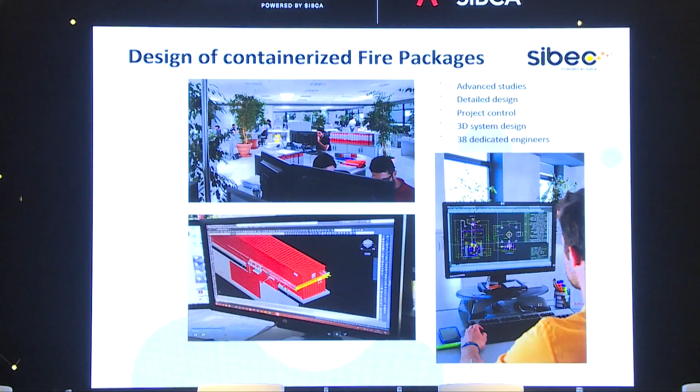Our company is located near Milano in Italy, and you can see the first building is covering the activity for the production of fire and gas systems. The central part is the mechanical shop for the equipment system and fire trucks as well. So in our organization, we have about 200 people. 40 of them are dedicated to the research and implementation of the technology and design of the system.

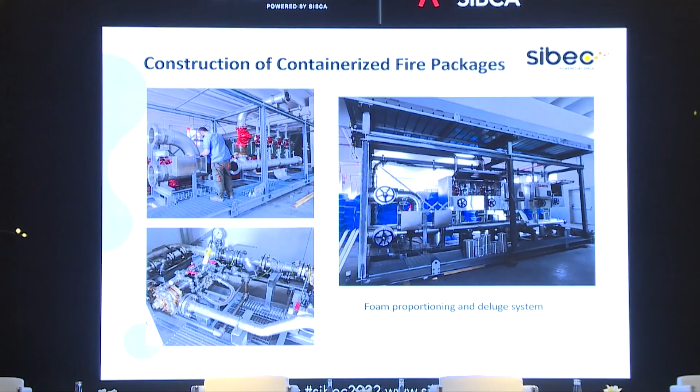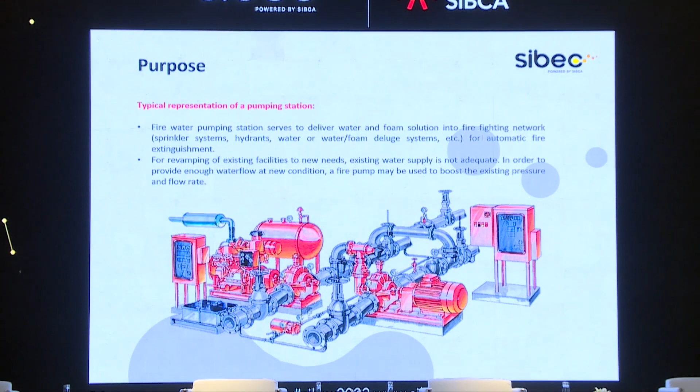You can see some activity during the construction of a deluge skid-mounted valve foam system, and this is a typical configuration of a pumping set. As you noted, there are many components, and each one needs some attention in construction and testing and so on.

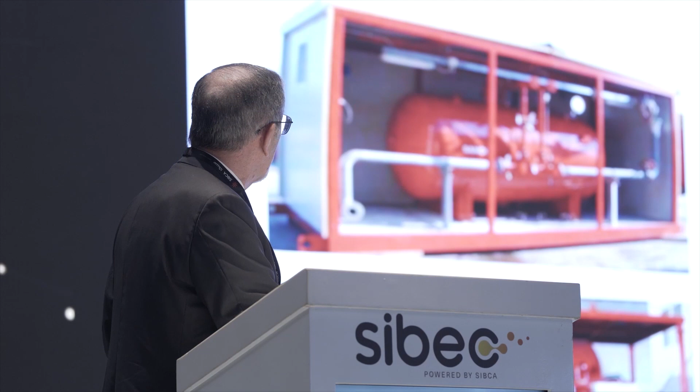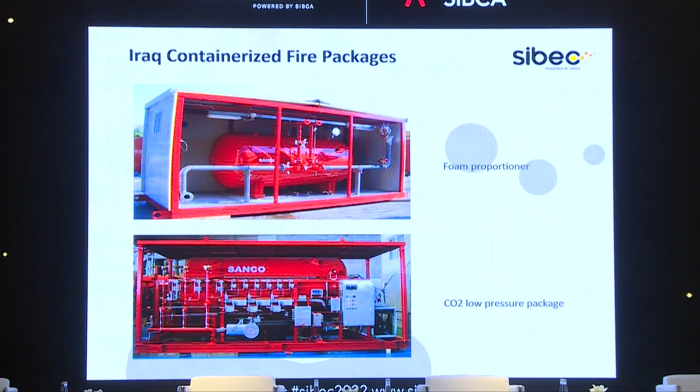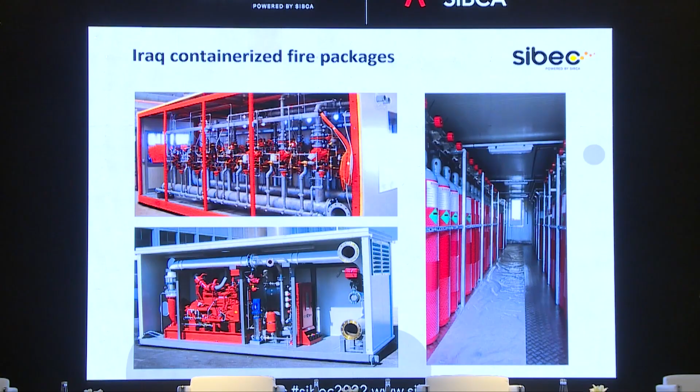What we did in the past, in the last 20 years, we started with Bechtel for a project in Iraq where they needed containerized packages in a very short time in safe condition, and we started those applications. It's just one part of our activity, to build the system in the container. So any system can be realized in a container.

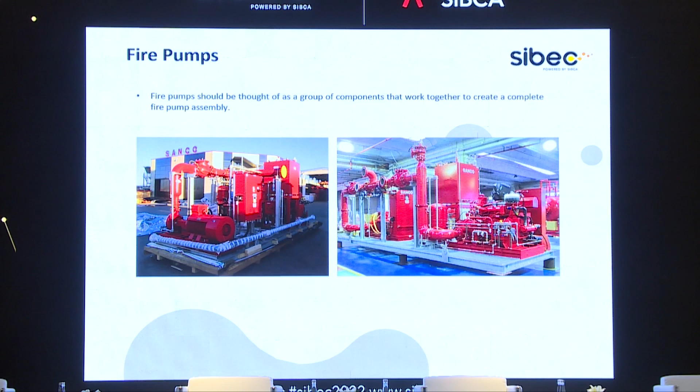So this is a typical design of configuration of a container 15 meters long. So it's quite complex, and it needs much attention during the construction and the relevant testing. You can see now some pump assembling. This is a typical construction that we developed, as I told you, 20 years ago with Bechtel, an American company that everybody knows.

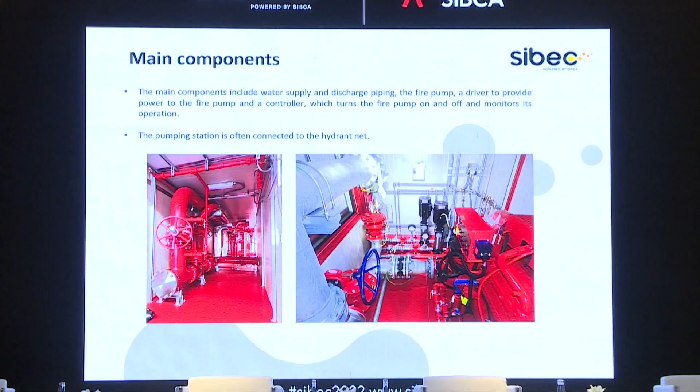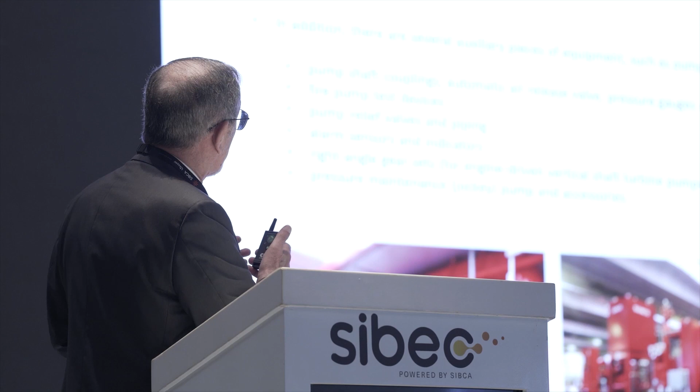The main components are inside the container. The container could be insulated according to the environmental condition. It means in some cases like the Gulf, we apply air force or air conditioning system, or in the opposite case, for very cold weather conditions, we apply the heating system.

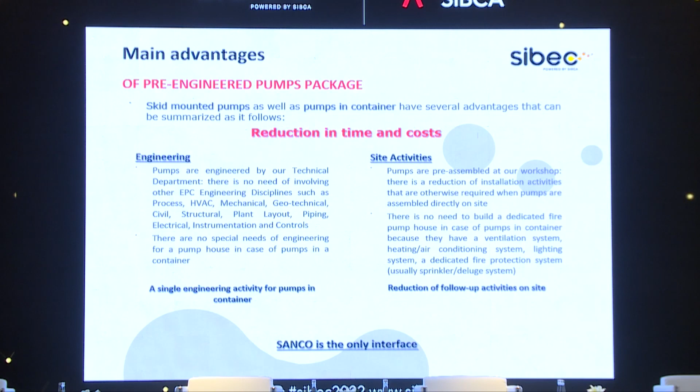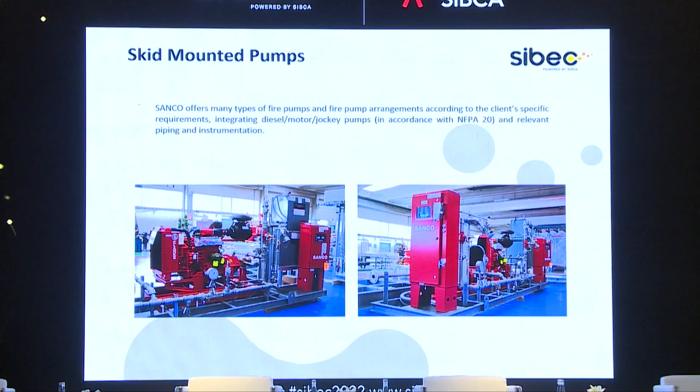So what are the advantages to build in the system, any system? We see some cases later on where we have a prompt answer for the installation, for instance. Safety condition for the people during the construction, avoiding any risk of leakage during the construction on site.

So everything is pre-tested, pre-assembled in our premises, is transported on site and very easily fixed, like a plug-in unit. In some cases, the container can be 2 units together to create really one pumping station or housing for the system. Like in this case, we have a canopy for the diesel engine to contain the noise in accordance with the specification. Other pictures showing the same.

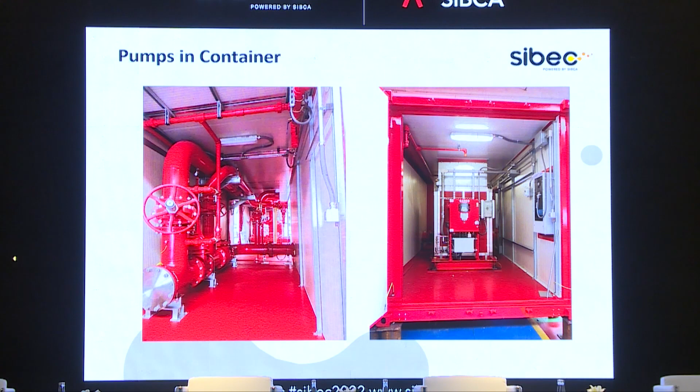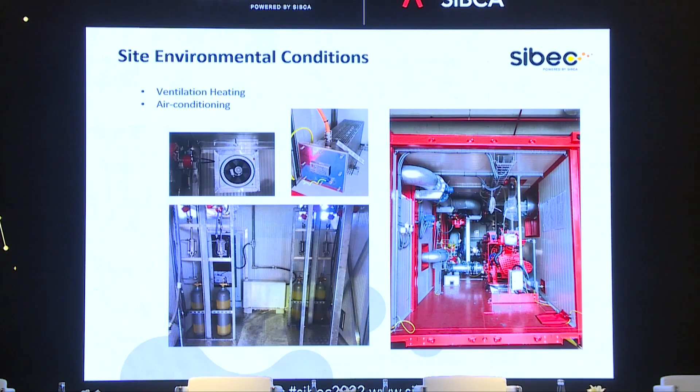As you can see on the content of the container, we have the insulation, as I mentioned before. Of course, in that case, we have the ventilation and the heating or air conditioning system to protect the content. Other systems in container: in these pictures you can see the deluge valve skid mounted, or in the next pictures, we see other cases.

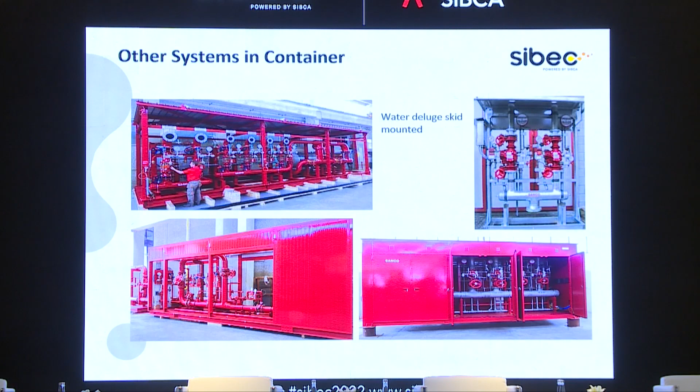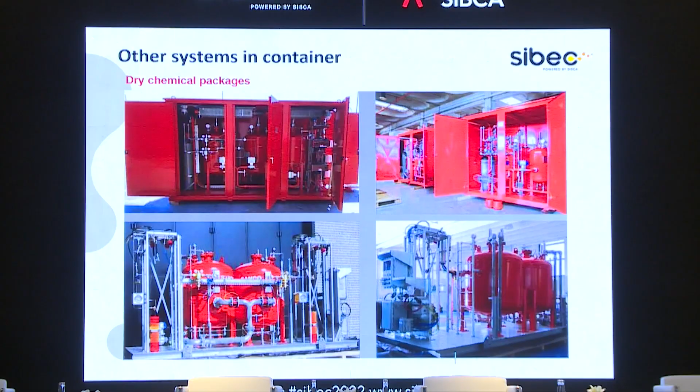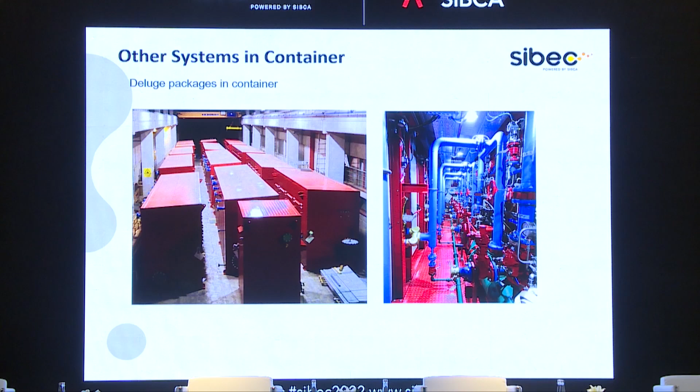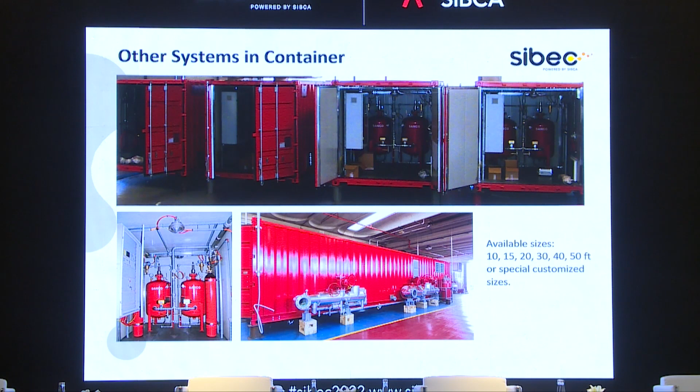The biggest unit we built was 15 meters, having a weight of 30 tons. Other systems are dry chemical systems in several capacities. In these pictures, we can see 18 units in container. We supply to Russia, and everything is built in accordance with the local regulation, and especially the low environmental condition, down to minus 52. In those cases, we supply to Algeria, in the contrary case, for temperature up to 65 Celsius.

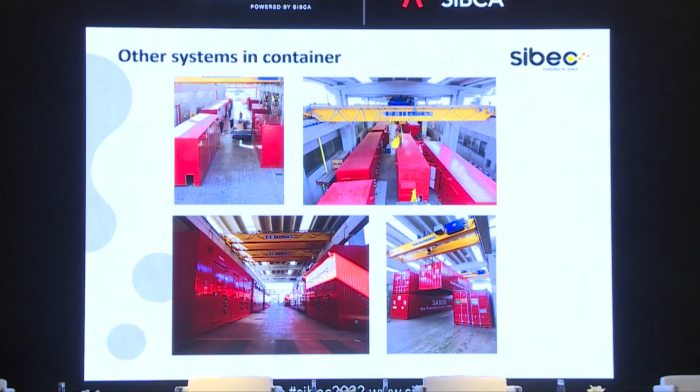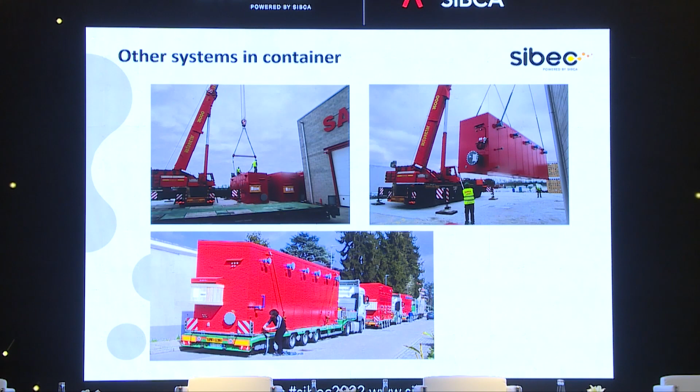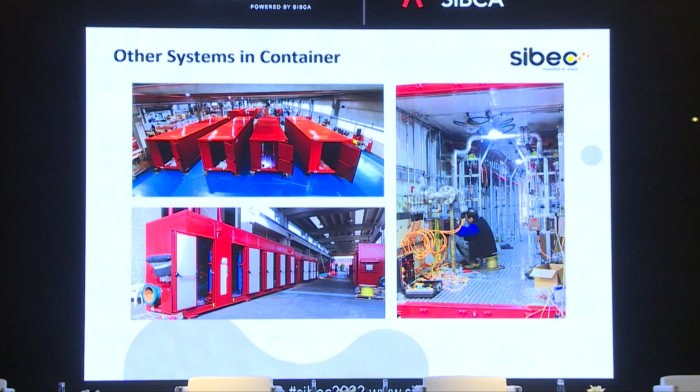As you noted, it is quite regular construction, but it is a part of our manufacturing activities. It is about 10% of our turnover. During the transportation of those containers, we have to consider the possibility of freezing during the transport to Russia. And we applied a double generator to keep the inside temperature at plus 5 degrees Celsius.

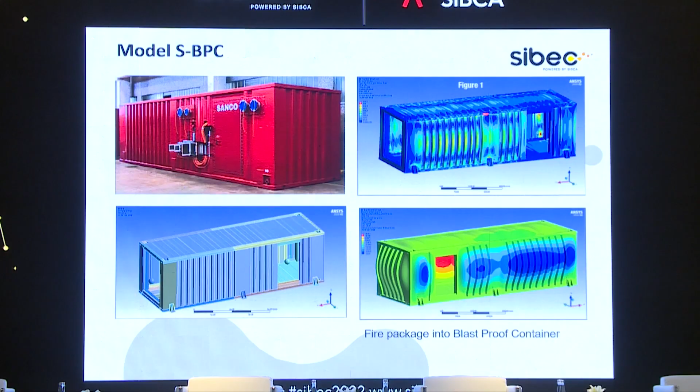So another special container, the blast-proof container, is the latest technology that we have developed for some projects, granting the function of the system even during blasting, in case of blast.